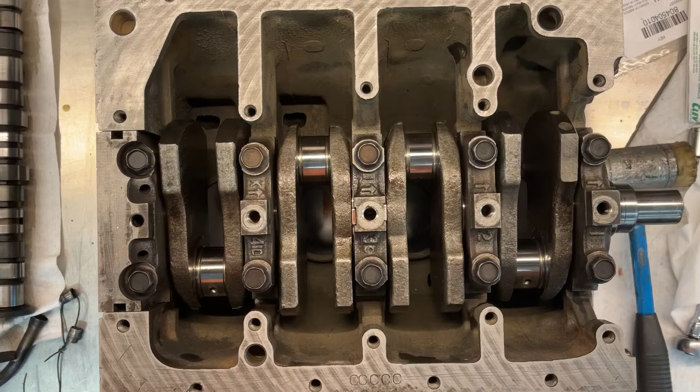All right, welcome back to this 1992 Subaru Sambar engine rebuild. I have bolted the last end cap in place, and it's important when you put this on that you get it flush with the rest of the block. So I snugged it down, gave it a little tap on the side, so it felt nice and flush, and then bolted it down.

That's torqued down. The next thing to do is a final check on the end play. I was able to get a 3/1000 of an inch feeler gauge between the thrust bearing and the crankshaft. The tolerance is between 2/1000 and 8/1000 of an inch, so we're good there.

Next thing to do is to push these rubber seals into the little void space here in either end of the main bearing cap. The manual doesn't really give you a lot of information other than to use sealant. So my thought process is I'm going to squeeze a bit of silicone down these holes and then tap these rubber seals in place. They're pretty firm, and it should hydraulic the silicone down into the bottom and then squeeze it back up and extrude out the top end.

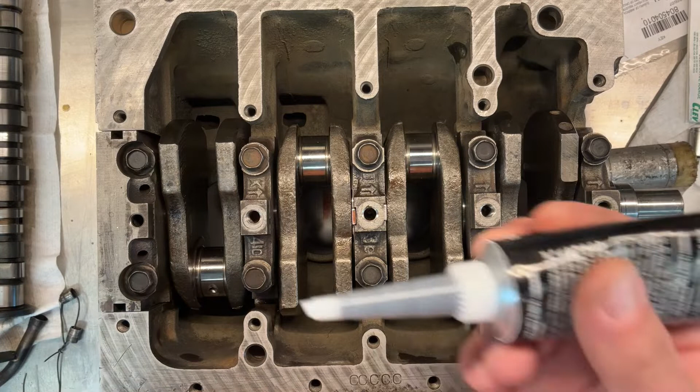So that should be a good solid seal with silicone, which goes along with what I found when I pulled it out; it seemed to be pretty much just full of silicone with the rubber seals in place. So that's what we're going to do. Push a bit of silicone in there. Hard to tell how much I'm getting in, but squeeze it in. A bit more in this one. And then I can put a little bit on the seal.

Last thing you want to do is have this leak after you put the damn thing together. That would not be cool. So let's see if we can do this here. Push that in. It does feel like it's getting solid, so I suspect it's going to push some silicone. It is. It's pushing silicone up. That's great, that's what I was hoping for. Yeah, that should be good for that one. Get the other one here.

I'm going to use a screwdriver just to push that down. Oh, actually, I can see it squeezing out inside the engine down below. Right down there, inside the engine. And also, in this crack out the side, it's squeezed out. So that should be sealed quite nicely once that cures up. So that should be the bottom end done up.

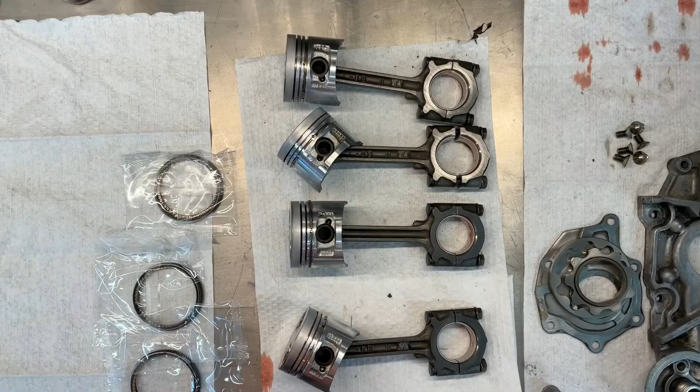The next thing for us to do is tip this on its end, and we're going to start installing the pistons. All right, moving on to the pistons and piston rings. I opened up one package already, and I threw the lower oil rings on. But the upper rings, number 1 and number 2, in this particular kit, it doesn't identify which ring is the upper and which is the lower. Further, I'm going to try and get this on camera.

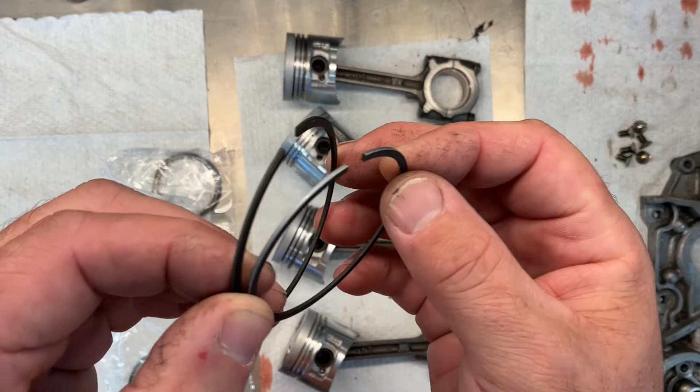This ring here has got a profile. Let's see if you guys can see. It's not perfectly square; it's got a bit of a notch on it. So this is orientated one side or the other. I suspect it's up. Normally there's a little bit of writing on here. I think you can maybe see that. Yep, this one has a bit of writing, so normally that would be facing upwards. So I suspect that's how it is. And I do think that this is the lower ring.

This is number 1. I've actually contacted the supplier; I went online to try to find out, and I can't find anything with respect to that. So I'm waiting for a response back to tell me which one goes up and which one goes down. Because to be honest, when I took the old piston rings off, I don't remember them being different, and unfortunately, they're gone. So I'm going to hold off on putting the piston rings on.

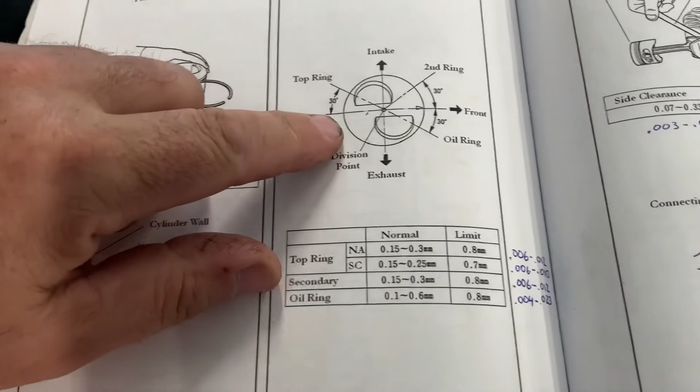But one thing you do have to do is check the gap on the piston rings when they're installed in the cylinders. I'm going to show you how to do that. Looking in the manual, all the ring gaps are orientated a certain way on the piston.

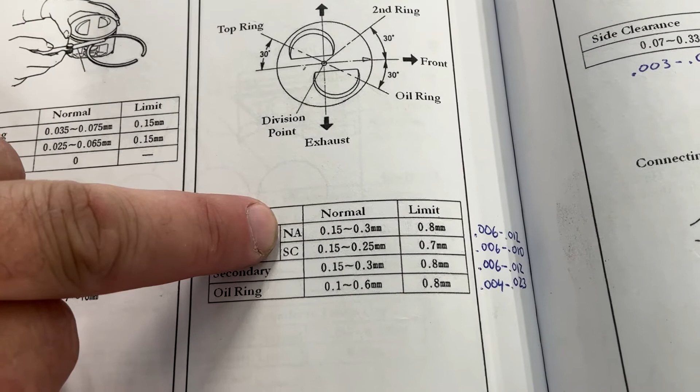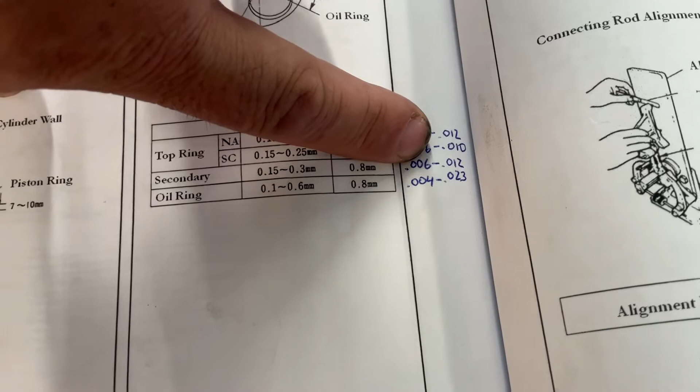We'll get to that when we install it. But more importantly, this is the end gap when you put the piston rings inside the cylinder. So for the top ring, this is a naturally aspirated engine, not supercharged. I've converted it from metric, but it's 6 to 12 thousandths of an inch end gap. The second ring is 6 to 12 thou, so the same. And then the oil rings are 4 to 23, quite a bit of a tolerance there. But that's what we're looking at.

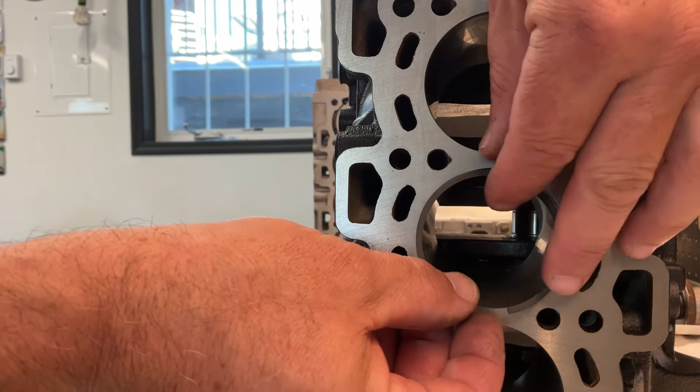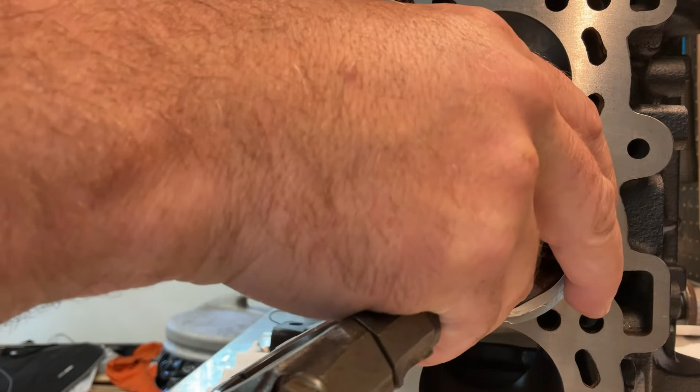Okay, checking the end gap. I got my cylinder here. I'd carefully take my piston ring and just squeeze it together by hand and work it into the cylinder. You definitely do not want to break one of these piston rings because you can't buy one. You got to buy a whole kit. It'll take you forever. So slide it in. I use the piston to square it up. I'll push the piston in a ways so that it's sitting there square.

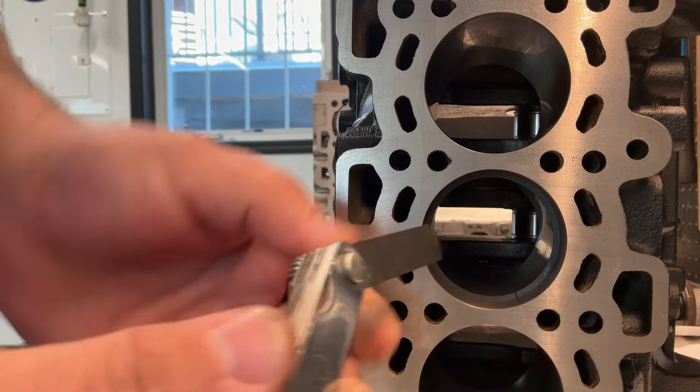I don't know if you can see the gap. Yeah, you can. So the tolerance is 6 to 12 thousandths of an inch. So I've got a 13 thou feeler gauge. Let's see if that fits. No, it doesn't fit. That's a good sign. Let's go down to a 12. It does look like a fairly big gap, to be honest, so I think it's probably going to be on the higher end. Yep, 12 fits. So that's right at the top end of the tolerance, so I'm happy with that.

We'll try the other piston ring. Let's see how that one works. Let's see if I can get it so you can see the gap easier. There we go, get it in there. Square it up with the piston. Check my gap. 12 fits. Let's get my 13. Hopefully it doesn't. But it is what it is.

If I've got a bit more of a gap, I'm gonna let it fly because I'm not going to be boring the cylinders out. And well, yeah, 13 fits as well. So I'm definitely a little bit past the tolerance on my end gap. 14 doesn't, so yeah, it's 13. So it's 1,000th of an inch over. Not the end of the world.

It is going to affect your compression a little bit, and it's going to potentially affect a little bit of oil consumption. But just to show you guys how you set your end gap. If it was too tight, you can just actually take a small jeweler's file and file the end so that you get that gap.

Okay, so I got some information. The compression ring at the top, number 1 ring, is just the solid ring. And the next ring, which has got a bit of a profile in it, is the second ring. And the wording on the rings is facing up. So we're going to go to time lapse. I'm going to install all these piston rings on here.

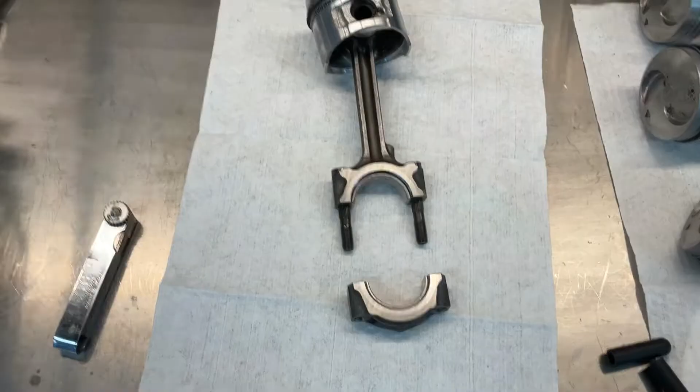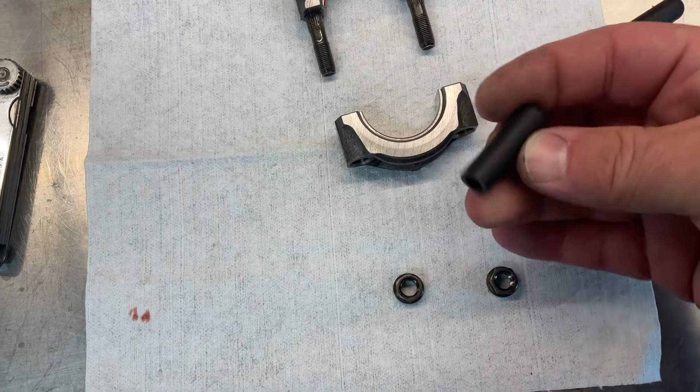All right, I got all the piston rings on. No breaking. That's good news. The next thing to do is install the pistons. One thing I do is I take some vacuum line, little vacuum caps, rubber caps, and I stick them on the threads because you don't want to have that piston get pushed into the cylinder and hit the crank and damage it. Don't ask me why. Maybe I've done it before, damaged a crank. You only need to do something like that once. Anyway, I put little rubber stops on the threads, and that protects the crank.

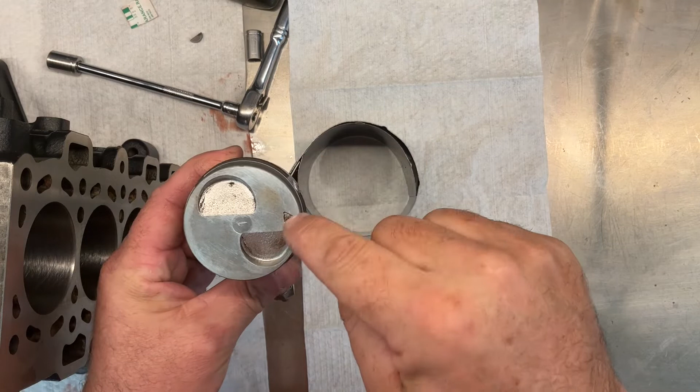Next thing we gotta also do is make sure that the piston rings are orientated correctly before we push it in. So I'll try to capture this all in video. All right, so I've got the piston rings orientated. Looking from the arrow, the first top piston ring is here, the middle piston ring is here, and the oil ring gap is about here. And then the second oil ring, I've actually put 180 degrees apart. It doesn't specify that. I don't want to have them both in line, so I put it 180 apart. But they're all about 60 degrees apart.

So next thing to do is I'm going to put some engine oil inside the cylinders, and I'm going to put some engine oil on the piston rings. I will compress them and then tap it in with the little rubber vacuum pieces on the studs so as to not damage the crankshaft.

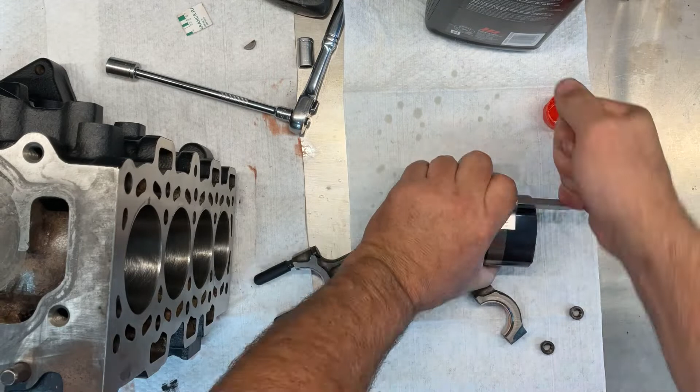get it started like that, and I'll take the wooden end of a ball peen hammer and just tap it in. You could use whatever to tap it in, but don't use metal. Get this squared up. There we go. So I'm going to tap that in. My crankshaft is orientated so that I've got lots of room. The throws at the bottom.

If there's any resistance to going in, stop, take it out, and recompress your piston rings. You do not want to have a piston ring slightly hanging out and catching and snapping while you do this, so you've got to be very careful. And there it is. The piston's inside. And now I just push it all the way down inside and get it to match up with the crankshaft.

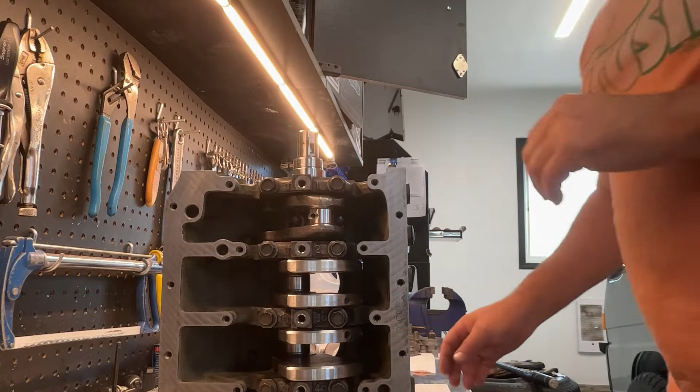There, I put the camera on the other side so you can see when I tap this in. I haven't done it yet. I just got it started, so I can see the crank is right here. I don't know if you'll be able to see it much, the lighting may not be that great, but I'm going to tap this in. It's going to go onto that journal right there. Pop these off.

Get some assembly lube. I'll put it on the bearing cap, although there's still some left over from when we checked the bearing clearances. Make sure it goes in the correct way. There's only one. I have to get a flashlight here. There, I got a flashlight. It's a little brighter. This is gonna go on like that. So slide that on.

Again, I'm not going to torque these yet. I'm just going to snug them up. I'll torque them later. And there we go. Number one piston is installed. Very good. So we'll do a time lapse here and get them all installed.

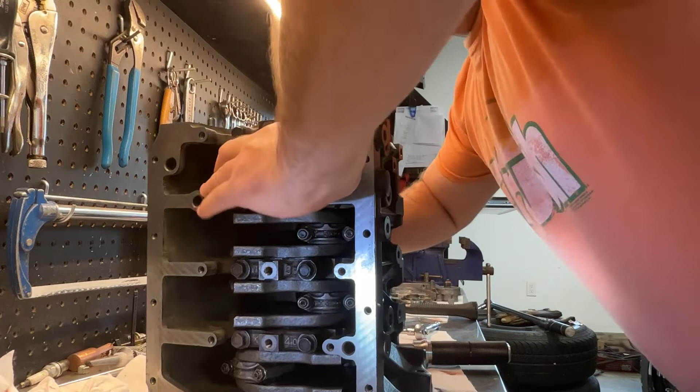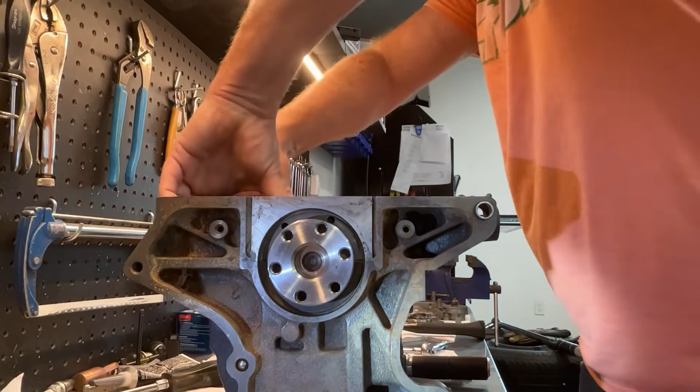Gotta turn it to get the other ones down where I can reach them, but it's getting a bit tight with all the pistons in there. Come on, see if we can get them there. No, not quite. Let's turn this engine over. There we go. There we go. Tighten these up.

Okay, those are all torqued down. One thing I wanted to also show you is there's actually a tolerance. I don't know if you can see, yeah, you can see how much that moves back and forth. There's a tolerance on that, which is 3 to 13 thousandths of an inch. So I've got a 10 thou feeler gauge, and I can't quite get it in there.

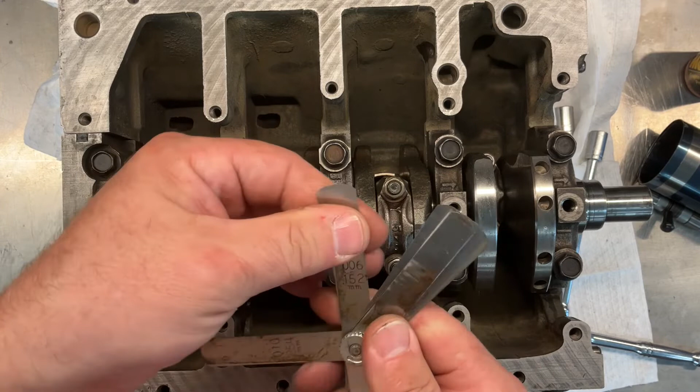I think it's about 9, which is great because you don't want to have your connecting rods binding up on your crank. You need a bit of end float there. Yeah, 9 thou there, 9 thou there. See if I can quickly check the other ones. 9. Just get 9. This one actually might be 10, I think. Let's just check that. No, can't get a 10. They're all 9 thou, so that's perfect.

Well within tolerance. The next thing we're going to do is install a windage tray or a girdle. It basically ties your mains and your block together. It gives it some rigidity. I think it also helps keep oil from splashing around and hitting the crankshaft as it's rotating, which robs you of horsepower. So this is the windage tray. This is how it goes on. It basically bolts through the side here and also into the top main caps.

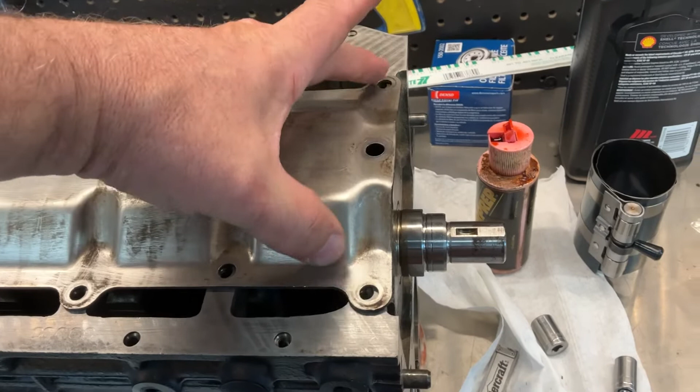But I also know that the oil pickup tube goes on top of these. So we have to actually put the front of the motor on with the oil pump, which is right here. I'm going to assemble that now. Another thing, way back when I took this motor apart, all the different bolts, you know, it's really hard to remember where everything goes. You bag everything, write it down. There's the windage tray bolts right there. So I'm going to clean these bolts up and the bolts that bolt the front of the oil pump together, and then we'll get going here.

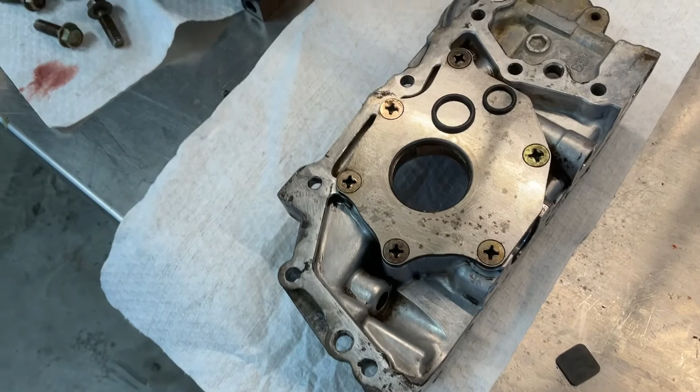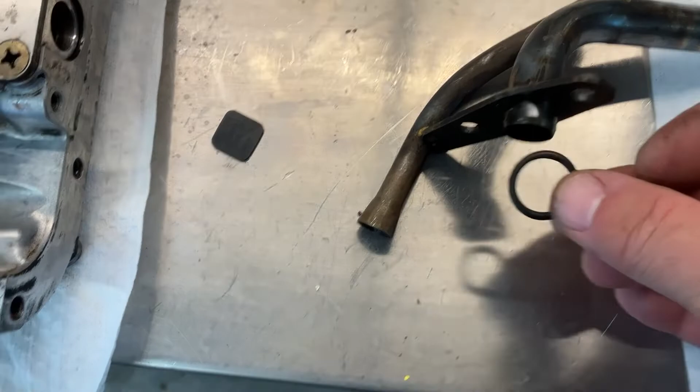All right, I got the oil pump reassembled. I didn't bother to video that. It's pretty simple, really. But one thing to know is right here is where the oil goes from the oil pump into the engine, right there. So there's an O-ring for there. And there's also an O-ring on the oil pickup right there. There's this O-ring right there. It goes onto the oil pickup. So just remember to replace those O-rings when you assemble it. So we'll just set up the camera and we'll do that.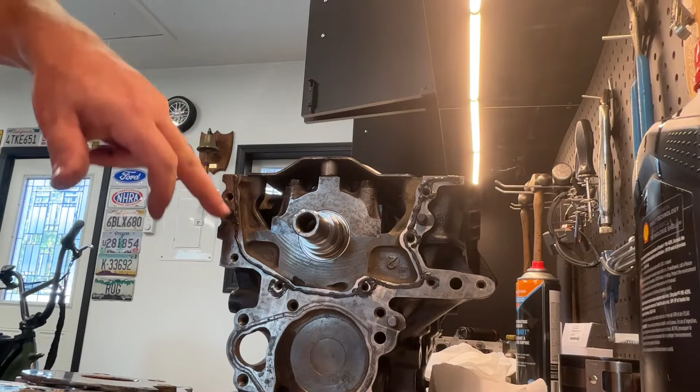All right, I got some silicone put around the face of the block, which will match up onto the oil pump. And then once that's bolted on, then we can do our windage tray. Okay, we got the oil pump on. One thing to note, on the oil pump, there's 2 little flats that will line up with the crankshaft. There's a couple of flats machined on the crankshaft. So you might have to twist your crankshaft a little bit to get that cover to go on, slide over the oil pump.

Now we're going to torque the bolts down. They're 5 foot-pounds or 60 inch-pounds. So we'll go around and do that. Doesn't take much. Round again, so check, yeah, they're good. All right, oil pump's on. Next thing we'll do is we'll put the oil pickup and windage tray on.

All right, back to an overhead shot of the motor. We're gonna put the windage tray on. This being the front of the motor where the oil pump is. This just sits over top like this. And put your bolts on. You want to do everything except for these 2 because the oil pickup is on those. So we'll just get these all started. It's actually in the book, they call this a stiffener plate, which I can understand why.

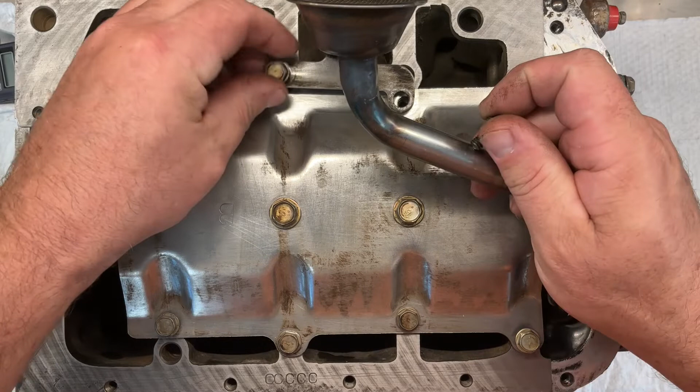Going to the oil pickup now. I'm going to install my new O-ring on here. And that will just go into place like that. Looks like this tube's got a little bit of tension on it, so I'm just going to push it over to the side a little bit to get the holes to line up. No big deal.

Now, nowhere in the book can I find a torque spec on these. They're the same size bolt as the oil cover, so I'm going to go 60 inch-pounds on the outer ones, and then I'll have to look up what the inside ones are here, just going by the size of the bolt.

But you know, I rebuilt a lot of engines in my time, and I will say this does seem not very tight. And this isn't an area I want a bolt to come loose, so I may actually go a little bit more than this.